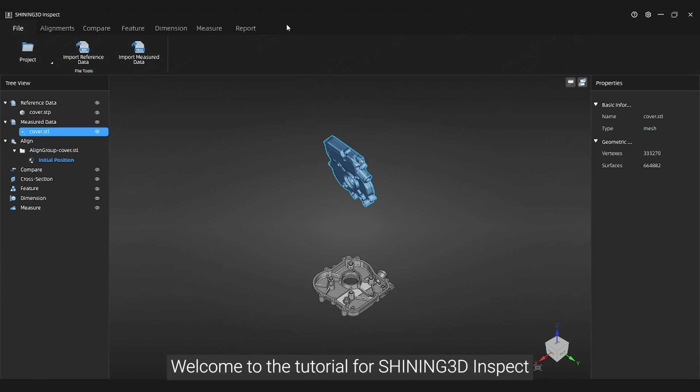After importing reference and measured data, you can click Alignments in the top navigation bar to enter the Alignment module, where you can perform Best Fit Alignment, Transform Alignment, Local Alignment, and Matrix Alignment.

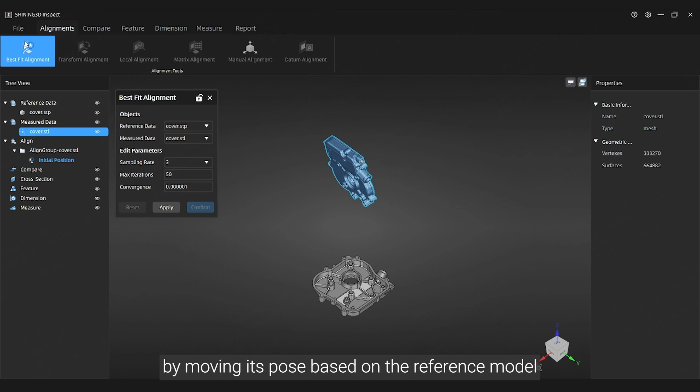Through the Best Fit Alignment, you can align the measured model automatically by moving its pose based on the reference model, minimizing the overall average distance deviation.

Select the reference data and measured data to be aligned, and edit the parameters sampling rate, maximum iterations, and convergence. Click Apply to see the alignment result in the 3D scene, then click Confirm to save the alignment object, which will be displayed in the Align group corresponding to the measured model in the left side tree view.

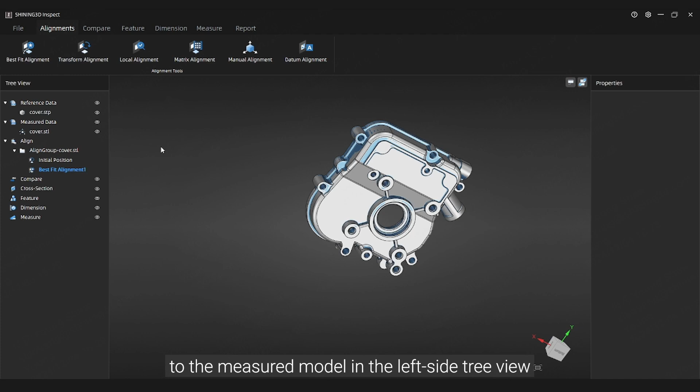If you want to change some parameters when alignment is done, just right-click on the Best Fit Alignment object in the left side tree view to edit the alignment and trigger the recalculation function. Right-click on the Best Fit Alignment object can also export matrix, which can be used for matrix alignment, and we will talk about it later.

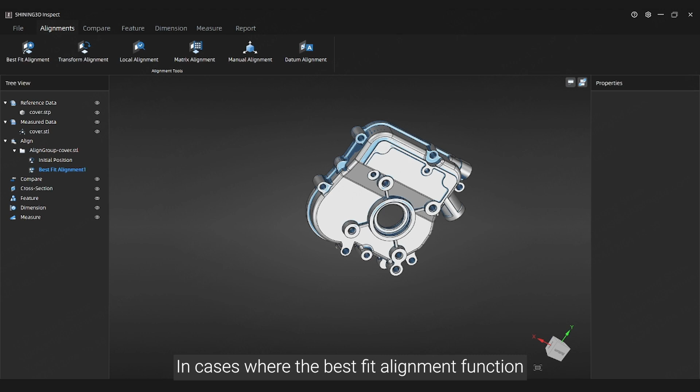In cases where the Best Fit Alignment function cannot be used for automatic model alignment, you can use the Transform Alignment function to manually align the reference and measured models by selecting sets of points on them.

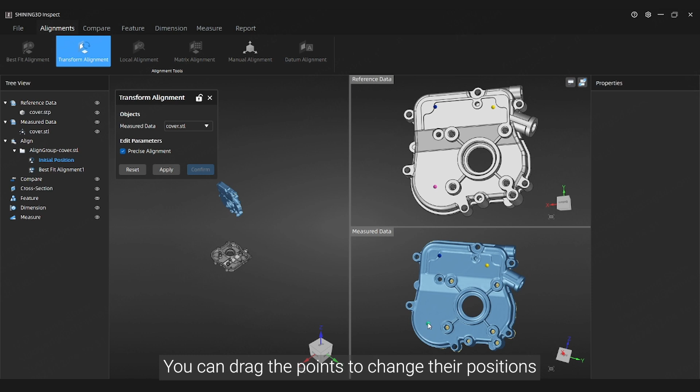Select the measured data to be aligned, and select at least 3 up to 6 sets of points on models in the reference data and measured data window respectively. You can drag the points to change their positions. Right-click on a point to change the tag color of that point, and you can press Delete to delete points.

After selecting sets of points, click Apply to see the alignment result in the 3D scene, then click Confirm to save. When Best Fit Alignment result does not meet the actual requirement, you can use the Local Alignment function to

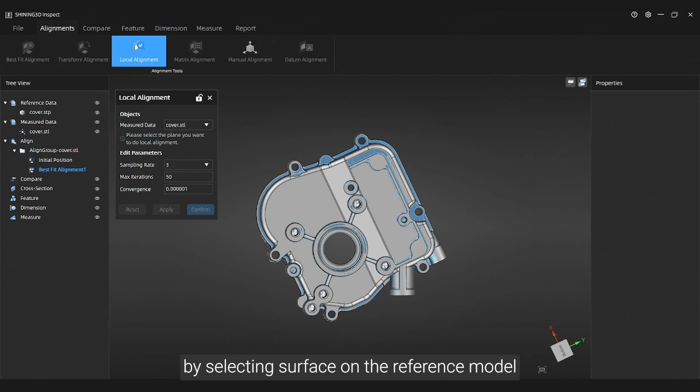fine-tune the alignment by selecting surfaces on the reference model, aiming to minimize the average distance deviation of the selected surfaces. Before using the Local Alignment function, it is recommended that you first use the Best Fit or Matrix Alignment

function to ensure that the measured model is in a similar pose to the reference model. Otherwise, it may result in the failure of local alignment.

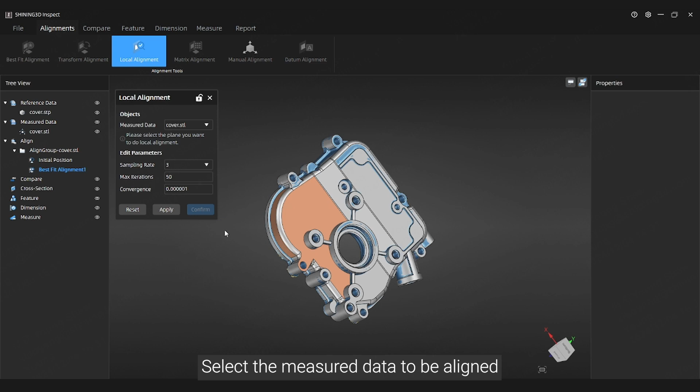Select the measured data to be aligned, edit the parameters sampling rate, max iterations, convergence, and select surfaces on the reference data. Click Apply to see the alignment result, then click Confirm to save.

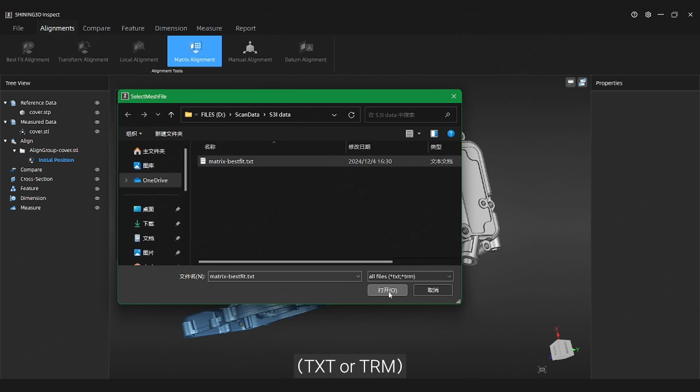Through the matrix alignment, you can directly move the pose of the measured model and automatically align it based on an existing matrix file, TXT or TRM, or the matrix of an alignment object.

Select the measured data to be aligned and select an alignment method, select a file or an aligned object. Click Apply to see the alignment result, then click Confirm to save.

When there are noticeable differences between the pose of the measured model and the reference model, manual alignment can be used to make fine adjustments to the initial position of the measured model.

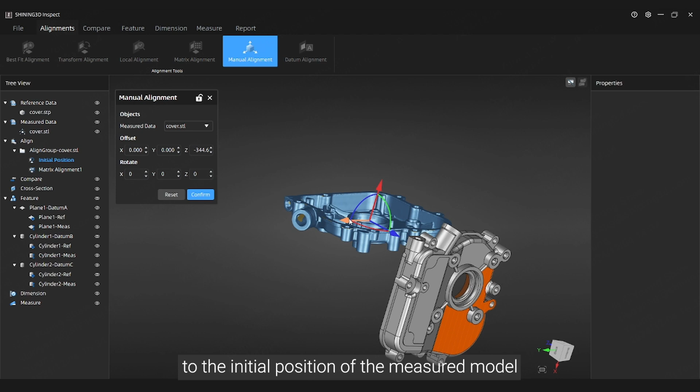Select the measured data to be aligned, and edit the pan distance or rotation angle of the model on the X/Y/Z axis. You can also manually drag or rotate the movable coordinate axis at the center of the model. Click Apply to see the alignment result, then click Confirm to save.

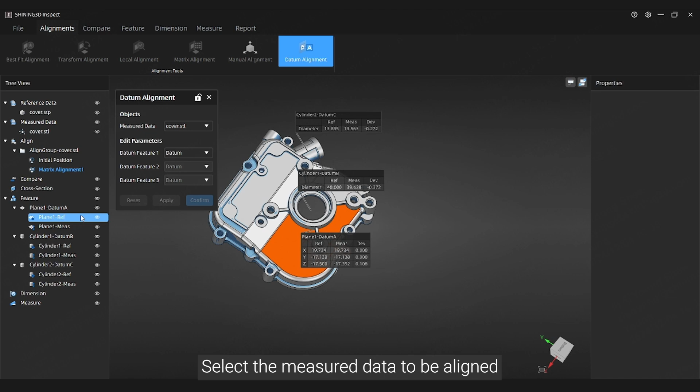If workpieces already have a datum system, existing datum can be used for datum alignment. Select the measured data to be aligned, and select the datum features including points, lines, planes, spheres, cylinder axes, and cone axes, one by one.

If the datum feature 2 or 3 is selected, readjusting datum feature 1 will automatically clear the selection of other datums. Click Apply to see the alignment result, then click Confirm to save.

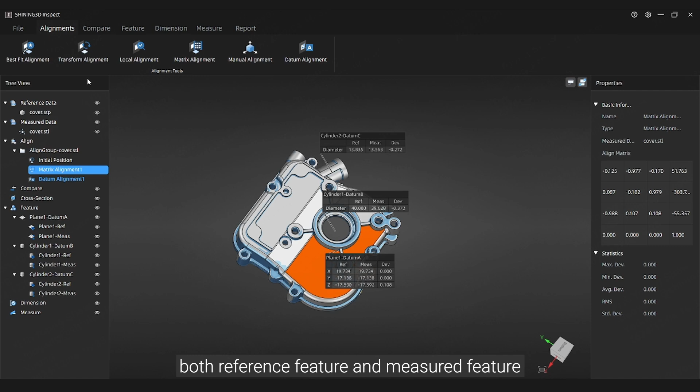By the way, before using the datum alignment function, please ensure that there are at least 3 pairs of datums containing both reference feature and measured feature. It is recommended that you perform Best Fit Alignment first to automatically align the model preliminarily.

For a measured model, multiple alignment methods can be used to calculate multiple alignment results. However, in the current model apply scene, only one alignment result can be displayed.

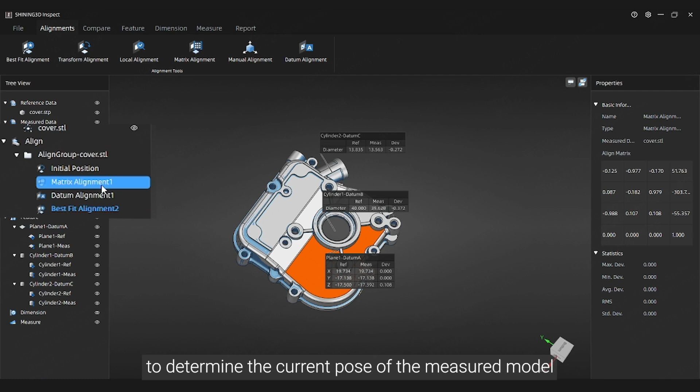Right-click and activate the alignment object in the left side tree view to determine the current pose of the measured model. Inactive alignment objects can be deleted by right-clicking on them.

After aligning reference and measured data, you can use Compare to perform 3D comparison, displaying the deviation between the measured model and the reference model through the color map. Besides, you can also create comparison points on the color map.

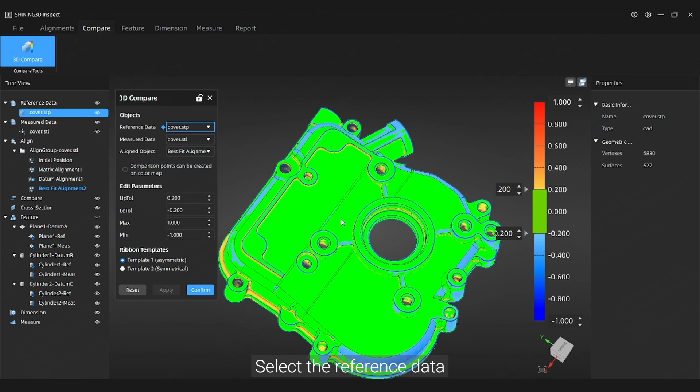Select the reference data, the measured data to be aligned, and an aligned object, and edit parameters: the upper and lower tolerances and the maximum and minimum values, and choose a ribbon template. The parameters above can also be directly adjusted on the ribbon.

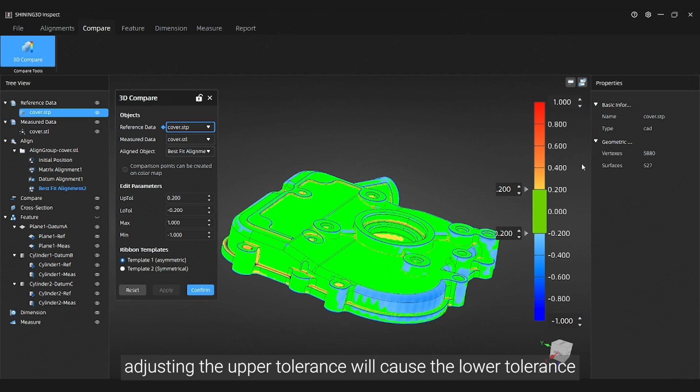The tolerance range should be less than the difference between the maximum and minimum values, otherwise it will not take effect. Additionally, if the absolute values of the upper tolerance and lower tolerance are the same, adjusting the upper tolerance will cause the lower tolerance to change synchronously.

If the absolute values of the maximum and minimum values are the same, adjusting the maximum value will cause the minimum value to change synchronously. Click Apply to display the 3D color map in the scene and the ribbon on the right.

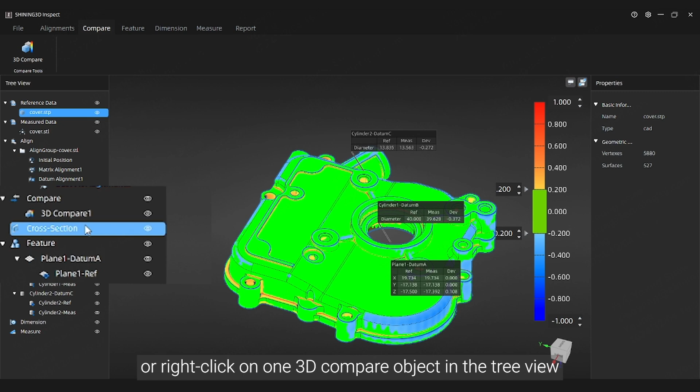In the preview state, you can click on the 3D color map in the scene to create comparison points, or right-click on a 3D compare object in the tree view, click Edit Comparison Points, and click on the 3D color map to create. For the created comparison points, you can use mouse left to drag or click Delete to delete.

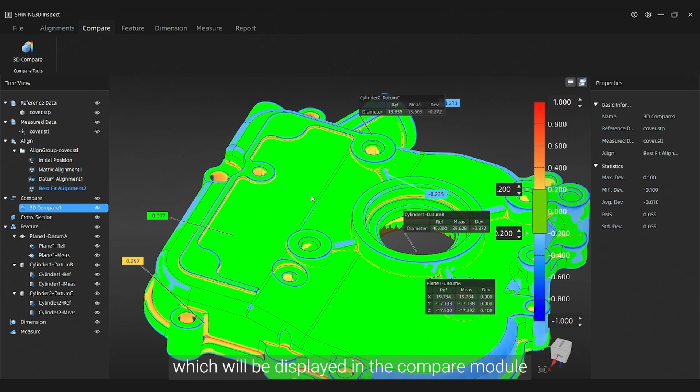Then click Confirm to save the 3D compare object, which will be displayed in the Compare module in the left side tree view. As the 3D compare object is associated with the align object, the 3D compare object can only be checked when the associated align object is activated.

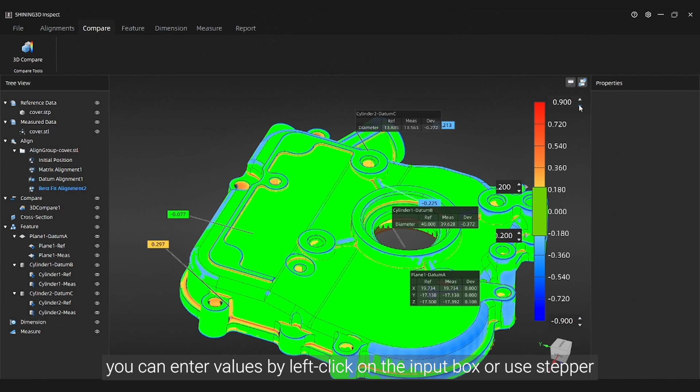Multiple 3D compare objects can be created for one align object, and each 3D compare object has one individual color bar. On the right side color bar, you can enter values by left-click on the input box or use Stepper, so as to adjust the tolerance range and the maximum and minimum values.

You can also drag up and down to adjust the tolerance range. When adjusting values, the parameter value in the 3D compare window and the 3D color map in the scene will be updated in real time.